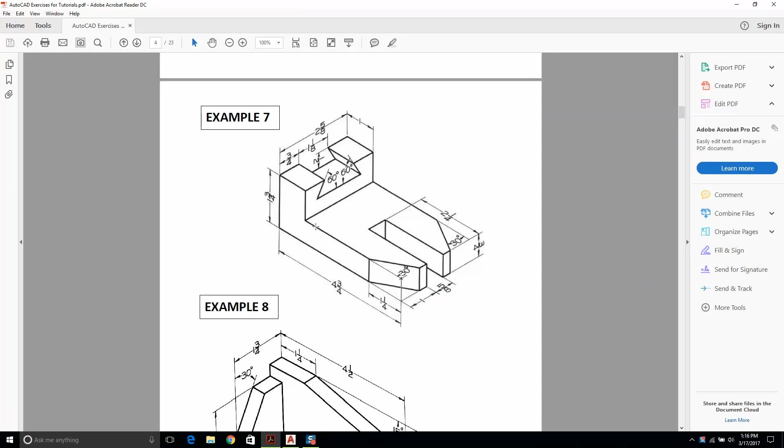We're on example number 7. I'll be honest, I'm going to skip example number 8. We'll do the 3 orthographic projections and an isometric in this video. I'm getting tired of the old orthographics, so I'll leave example number 8 for you to do yourself. The next video will be example number 9, where we'll teach you something called a polar array.

Okay, let's look at example number 7. What will we do? We're going to go new, sheet sets, manufacturing imperial, and this is our template that we're going to use. And I'm going to go to model.

I'm going to turn on the grid. I'm going to go to layer properties, and go new layer. We'll call this construction 1. Let's make this yellow, and let's just go with that. I'm going to give myself 0,0,0,0. My polar is on, so I can just snap to there like that. Lovely, we'll right click here, get rid of that, and let's have a look.

So let's just get our 3 boxes. This is going to be our front view, that's our top view, and that's our right hand view. Do you remember what type of orthographic projection it's called? It's called third angle here in the United States. That's the configuration of projection we're doing. So let's draw our 3 boxes.

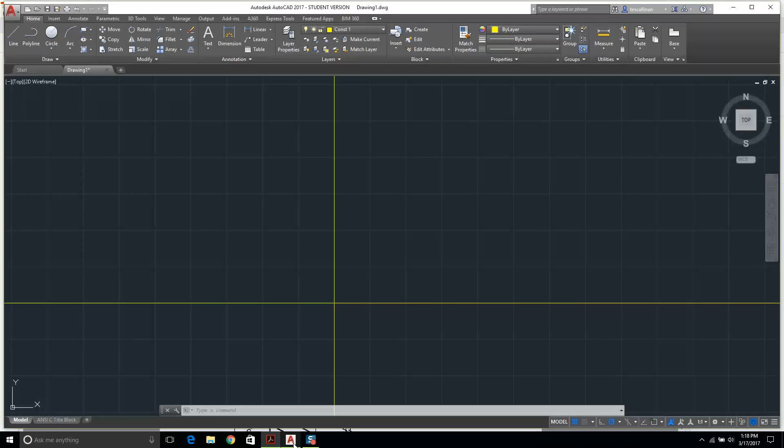We need 4 3/4, that's 4.75, to there. And what's the height? 1 3/4. So I'll go offset again, 1.75.

That's the first box. I'm going to do an array. I'm going to give myself a spacing of 2 inches. That's good. And I'm going to get myself another spacing of 2 inches.

I think the trick in this problem is going to be doing the isometric again. These angles are going to be a real pain, and I might not be able to do them. But hold on, let's not be too pessimistic. Right now, let's think about this.

I have 2 5/8, 2 5/8. Offset 2.625 to there, and then this has to be 2 5/8. I'm going to press enter, and then here. So here are our 3 boxes. This is our front view, this is our top, and that's our side.

Look, there's no harm in let's go new layer. We're going to call this Dimen 1. I'm going to make this side green because it's St. Patrick's Day today.

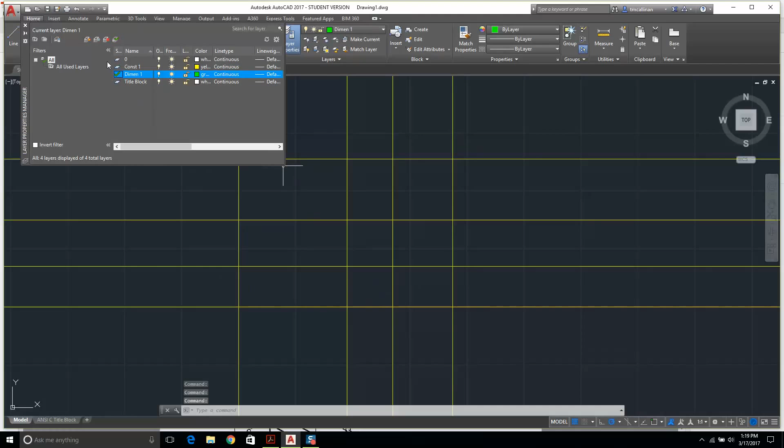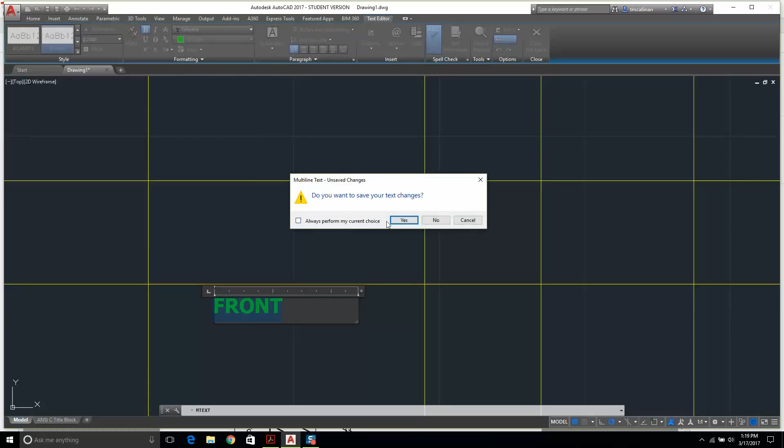And let's go text. I'm going to call this view front. I'm going to highlight it all. Romans, not really, I like Arial or Tahoma. There we go, and we go bold. That works, I like that. I'm going to put the front there.

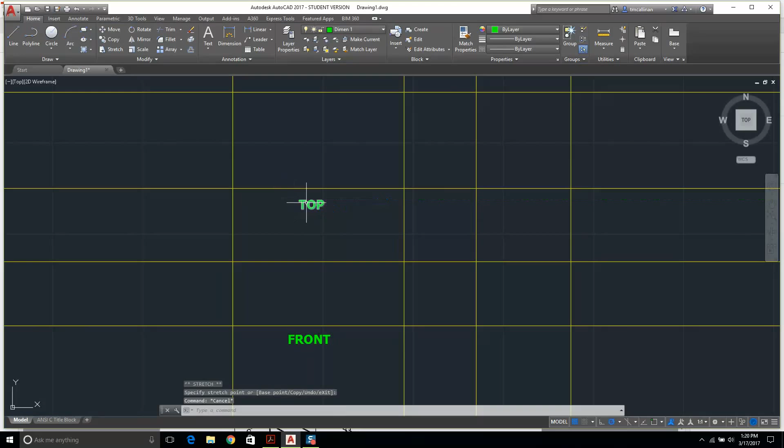Control C, Control V. That's going to be top. Now I need to move it over a little bit and line it up. That'll do. What am I doing here? I'm clicking on it, hitting Control C, then Control V. I'm copying and pasting, that's what it's called, you know that already. Alright, I'm pressing Control A to select everything, and I'm just putting it inside.

Okay, front, top, side. Alright, let's go back here for a sec. We have this L shape that we would see, and then we would come up 3/4. So it's like an L shape, and that's 1. Okay, I'm not going to remember any of that.

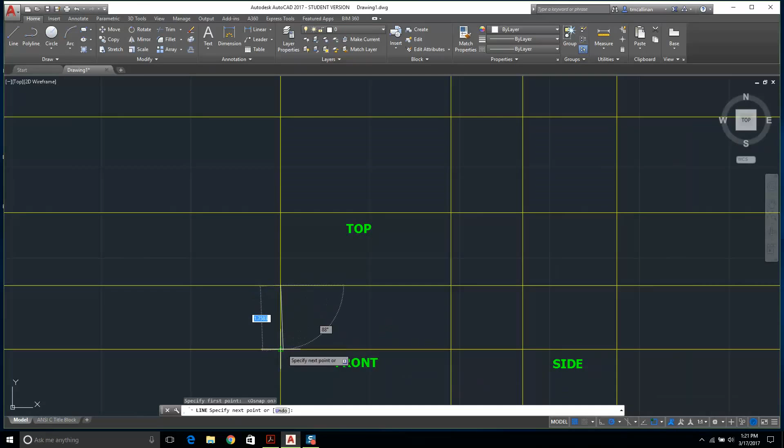Let's do this. I'm going to go back to my 0 layer, and it looks something like this. Now why is it not snapping? I'll turn on my snap. I'll go from there down to there, over to there. I need to come up 0.75.

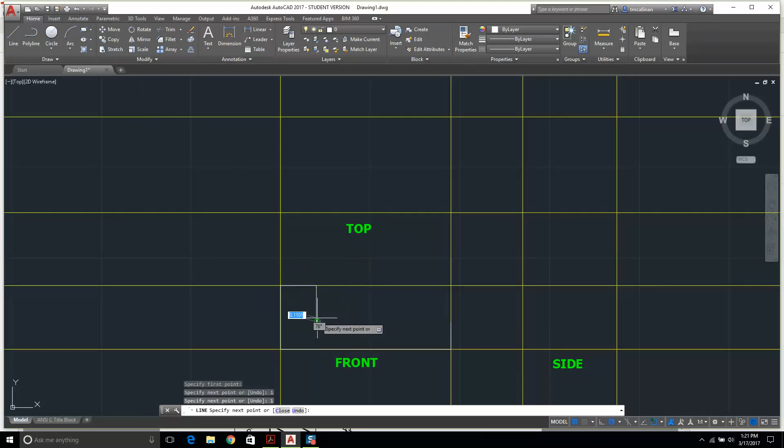Now what's that length? I may as well come over from the other side. That's 1 3/4, so it's 1 and 1. So I'll start here, I'll come over 1, come down 1, and then I come over and it snaps in. Lovely, I have my L shape.

Okay, that was easy. Now we have the L shape, let's worry about the top shape. So, alright, let's think about this.

What I would say is let's worry about, imagine that there's no cutout here, this 60-degree cutout, and imagine that there's no cutout here. Let's just deal with that. So I'm going to draw a rectangle from here to here.

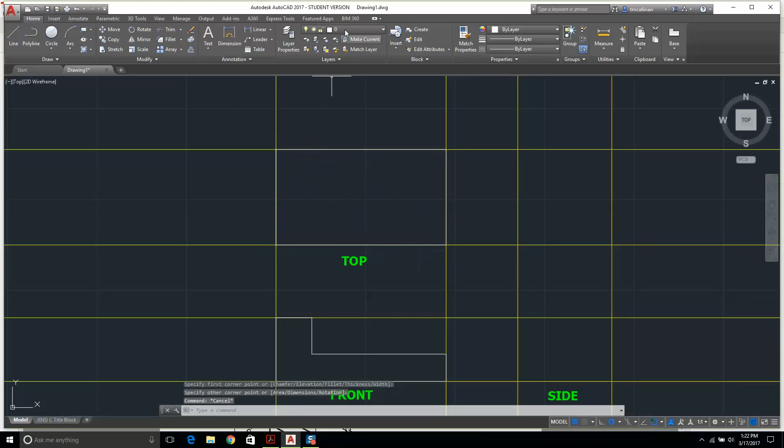I'm going to get myself a construction line, and I'm going to project this line all the way up, like so. And we know, or hopefully you know, that we'll have a line right there. Now we know that we have some sort of an angle going on here, so I need to come down 1 1/4. Let's just do a 1 1/4 line.

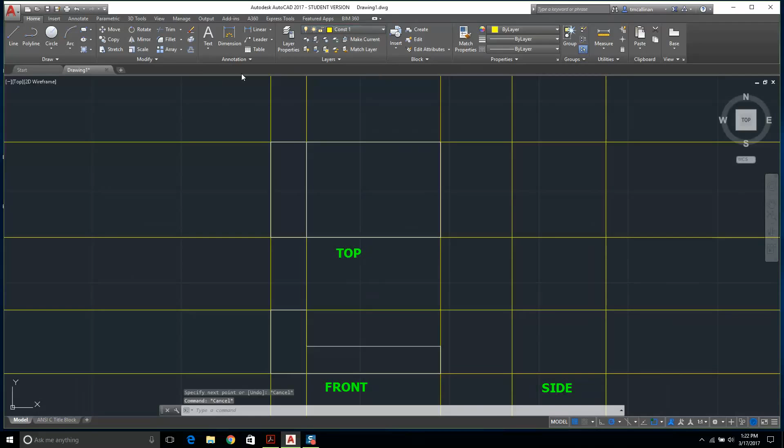All right, offset 1.25. And then how is it a 30-degree line from there? Okay.

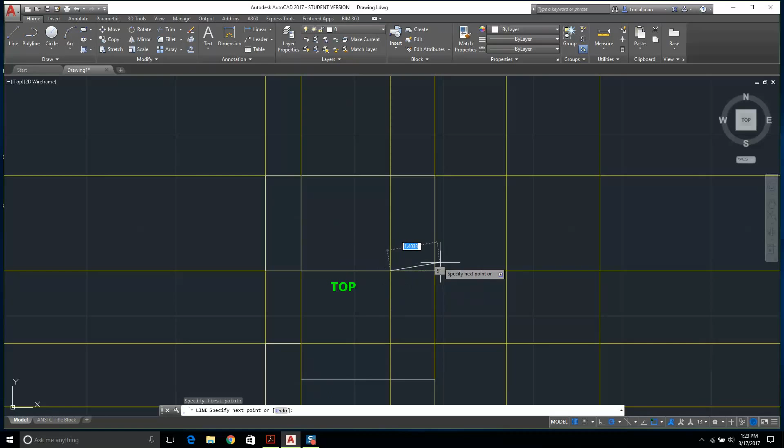What's my brain thinking here? I'm going to always pick the easiest way to do this. So I'm going to make that, make it a length of 3, then hit the Tab key, and make this 30 degrees. And that's what I got.

There's probably a better way to do this. I'm going to just trim it. So I have that, and let's get - I need a center line.

And we need a 2 1/4 from this end. An offset of 2.25.

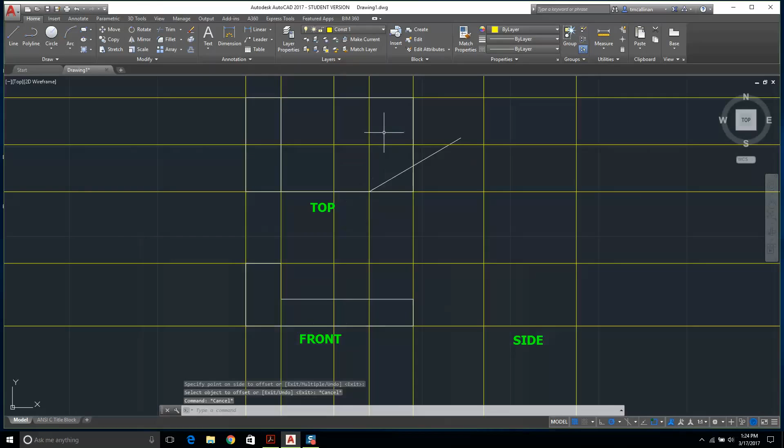Now what is there, there's a rectangle here that comes in. What is it? It's a width of 5/8. Oh, my brain is melted. What's 5/8? 0.625. That means it's 5/8.

I think that's 5/16 then, which is 0.3125. So I'll go offset 0.3125, and I'll go from there to there and there to there, and we have a box. Like so.

And I'm going to mirror that to the other side. So I'll go, where's mirror? Here it is. This is the chap that we want. I'm going to mirror, I can use that point and this point. I can use any 2 points along any of those lines. I've got loads of them to select from. And there. Do we want to delete the source object? I'm going to press enter because no.

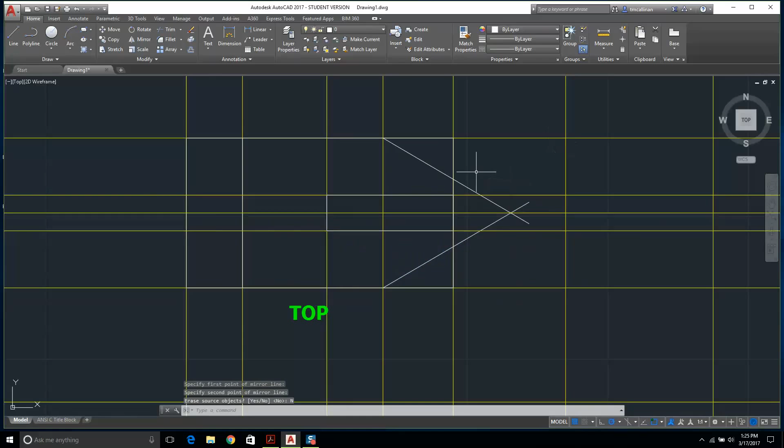And then I'm going to turn off my construction, see what's going on. And I'm going to hit trim. I press enter to select all, to select everything. What does that mean? I want to select all the geometry to be part of it, and then I can trim that. I can trim this. Lovely.

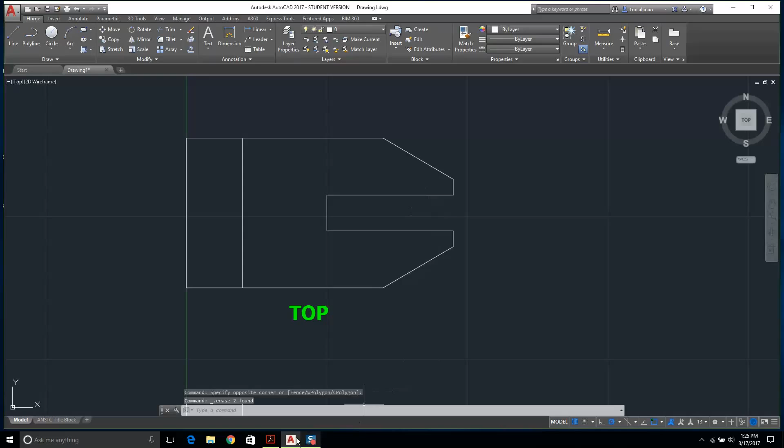Now, does that look right to you? Okay. All right.

And then we have this business going on here at the top. I'm going to draw that in the side view. So hold on a second. I'm going to turn on my construction lines. And I'm going to get myself a horizontal line.

Alright, rectangle, like so. Do you see, if you make this distance the same as this distance, and they're both 2 inches, you can do something, you can get yourself a 45. I don't know if I want to do that.

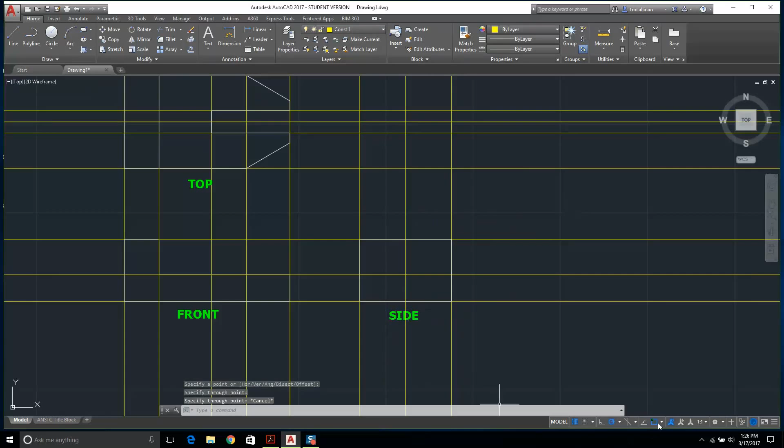Let me just get a center line here. Now I'm using that midpoint there, so make sure that midpoint is turned on in your object snap. We also have, hopefully you realize that there's a line there going from there to there. Why? It has a corresponding line here. Every line will have, not all, but it'll have a corresponding line. It might not be shown though.

Okay, now what do we need to do here? We need to go back to construction. I'm going to go to here, array, not array, offset, 0.3125. I'm going to make this guy offset to there, and make that offset to there. And I'm just going to draw these lines in.

Like so. Alright, okay. I'm going to delete all of these construction lines, anything I don't really need. I'm going to bring, I have this point here.

You see this point? I'm going to have to drop a line down there. You're going to see that edge. What am I talking about? It's this edge here. How do I get that? It's wherever that point is, I bring my construction line down. Let's just draw that line in.

Okay. Now I need to draw this. Okay, let's draw this. So I need to come down a half, and I have 1 1/8. So offset 0.5.

I need, let's get this 1 1/8. I'm going to get my old calculator out. Can I be of assistance? 1.125 divided by 2, thinking... 0.5625. Thank you.

Alright, offset 0.5625, and I'm going to go from here to there and from there to there. Now, 60 degrees from there down, and 60 degrees.

Let's go back and think about this. Okay, 60 degrees. So from there I need a 60-degree line, and from there I need a 60-degree line. And I'm just going to get my 0, my main layer. I'm going to come here.

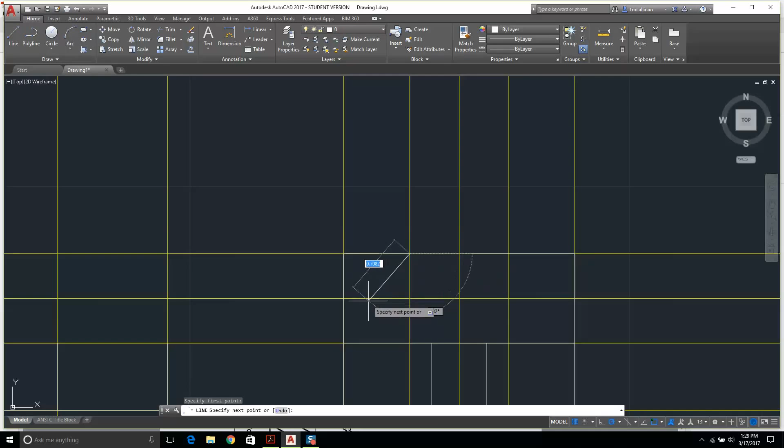Now it's telling, if I don't really care about the length, I'm going to make this just 1, and I'm going to hit tab. And I want that to be 120.

Okay, and I'm going to check it. Dimension. I'm going to go from, that's nice, yeah. Now it won't lock onto that because it's a construction line, so I'm going to have to draw another temporary line. Now let me think about this. Is that really going to be 60 degrees?

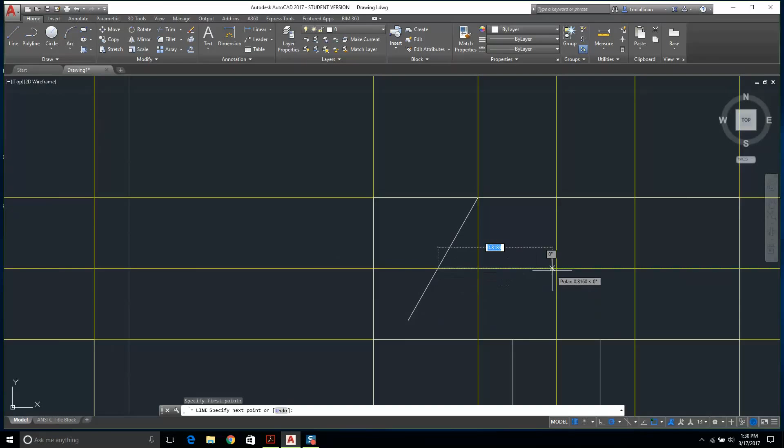It's going to be this, lad. Okay, let's do this. Let's get rid of that. Let's draw that in there like so. And I'll get my dimension, and I'll go from here to there.

Lovely. Okay, I have to think it. I've been doing stuff like this for a long time, and this stuff makes me think, and that's not necessarily a bad thing. Okay.

Let's mirror all of this to the other side. Select objects. I'm going to go from there to there, and then I'm going to turn off my... what's going on there? I did that too fast. Mirror, there to there. Erase source objects, no.

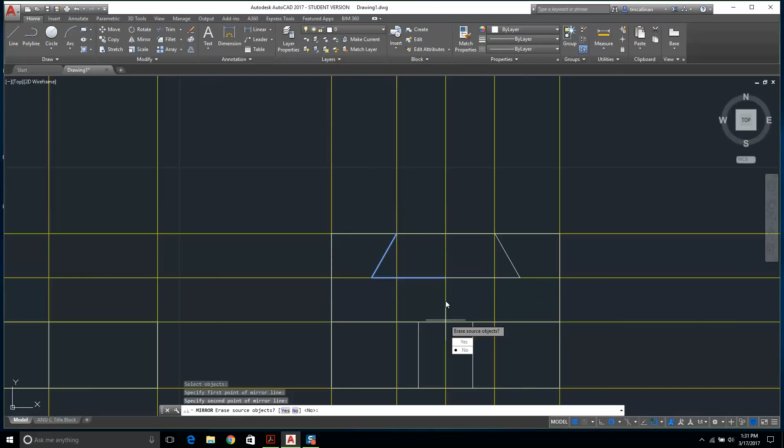Okay. Trim. Boom. That wasn't too painful.

Top, front, side. Now we have to... I don't see any line here. Now I'm going to get rid of both of those lines and have one line.

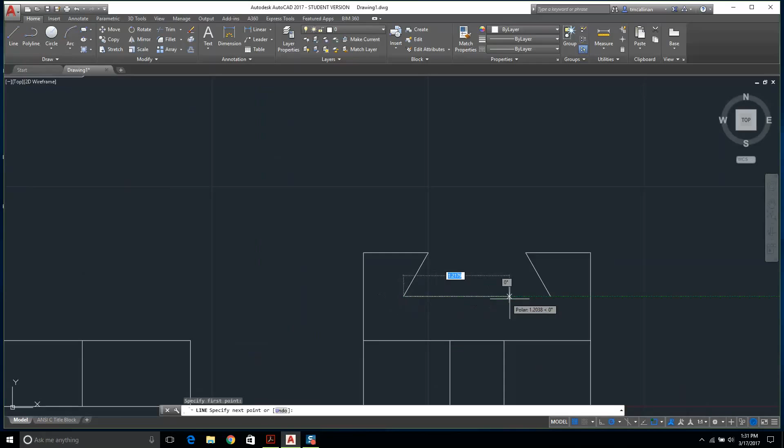I don't see any corresponding line over here. This line should have a cousin over here, which I do not see. And would we see that line? This is a cutout here, and we see this outside wall. Would we see that line there? No, we won't, but it's still there.

So what type of line do we use? Do you remember? Right click, new layer, hidden, continuous, load, hidden. No, come on. Lovely.

Alright, I'm going to get myself my hidden line, I'm going to put a line from there to there, and that'll do the job.

What else? We have a cutout here. Where is this line? This line should have a corresponding line down there. We need to show from this view that this cutout goes all the way through, but can we see it from this side? We can't. It's still there though. Every line should have a cousin. So this line is going to have a line here. It's hidden because it's behind the object.

Now let's think. We're going to see... I'm going to do something like this. I was disputing whether I was going to do it or not. I'm going to get myself a 45-degree line.

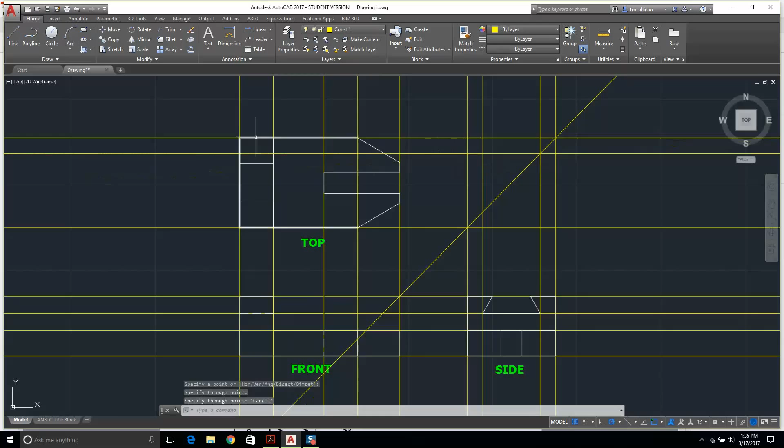Wherever this intersects, wherever that intersects, we're going to transcribe, if that's even a word, a line across, or just scribe a line over, like so. What type of line are we going to draw here? A hidden line.

Right, let's turn off the construction layer. And is there anything missing here? We're missing two lines. Are we missing more? Just two lines, I think.

If we're looking in from the front of this object, you'll see 6 lines. You'll see this line, you'll see this, you'll see this, you'll see this, you'll see this, and you'll see the other one. Now, so we're missing those two lines.

So let's turn on the construction, and let's just get rid of these lines here.

Some people, when they're drawing this type of drawing, will have multiple construction layers. They will not delete the existing construction layer, which is smart. They'll just hide it and then create another one. I'm too lazy to do that, but look, that's the right way of doing it. I'm teaching you bad habits already.

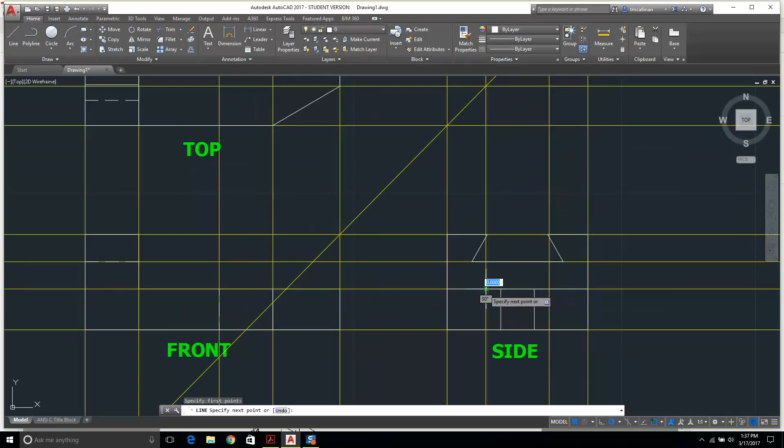So I bring those down, and then here we go. We have from there to there, and from there to there, and let's turn off the construction layer. Okay, top, front, side. I think that's it.

Right, I'm going to take a quick cup of tea. We're going to do the isometric, which is going to be a beast, I think. And then we're going to add the dimensions, and then we're going to put it on a drawing. I'll see you in a few minutes.

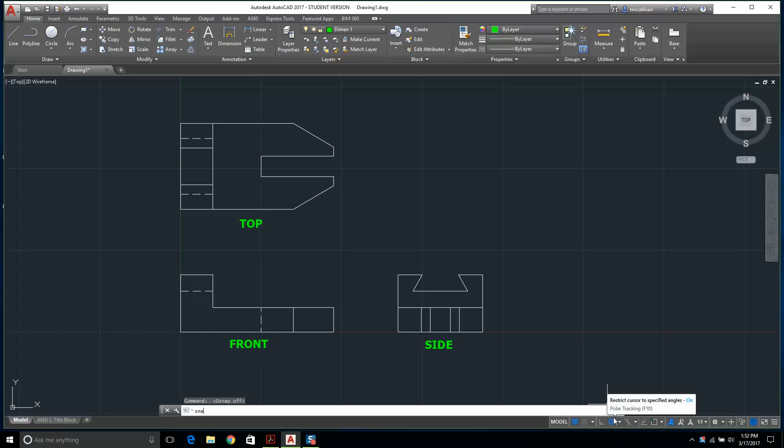Right, so the next step, we're going to do the isometric, then we'll do the dimensions, and then we'll throw it on the drawing. In order to do the isometric, I'm going to turn off the snap, F9. I'm going to use a normal snap, but let me look at these dimensions here for a second.

5/8, 1/8, so we're going to have to use a 1/8 snap. That's fine. And right, snap. What size? 0.125. Okay. And then I'm going to turn on the ISO plane, and we're drawn in a different plane or angle.

So let's look at this here. This is where we're going to start. We'll go down 4 3/4. We'll box all this in. Let's just start with the L shape, 4 3/4.

So I'm going to start right here, and I'm going to come down 4.75. I'm on the wrong layer. Let's put this on 0. There you go.

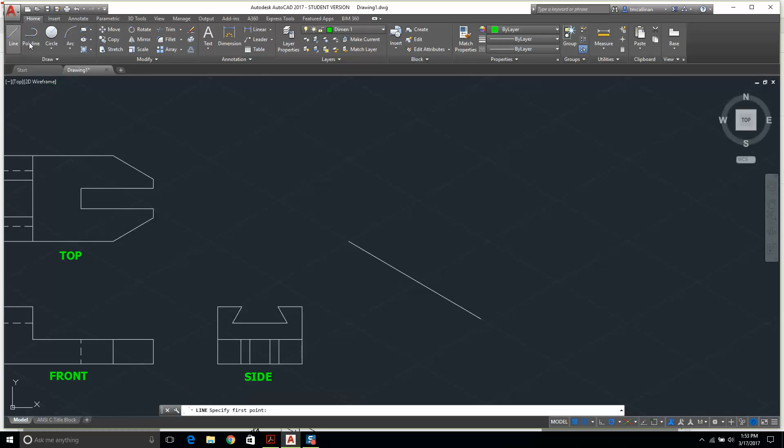4.75. And how high are we going to go? 1 3/4. 1.75. Ah, shite. Stay there. There you go.

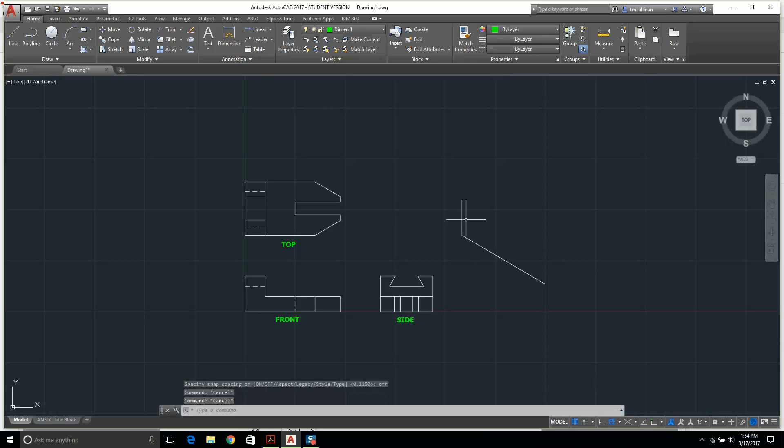And we have the dimensions here. I didn't put the dimensions on. Go on, let's put these dimensions on here, and it'll make life a bit easier. I'm going to turn the snap off. Come on now. Snap off. And let's go back to let's turn this off. Come on now. There we go. And we get the dimensions going.

1.75. 0.75. From there to there. 2 5/8. We go from here to there. Let's bring this out a little bit. No, that's good. That's good.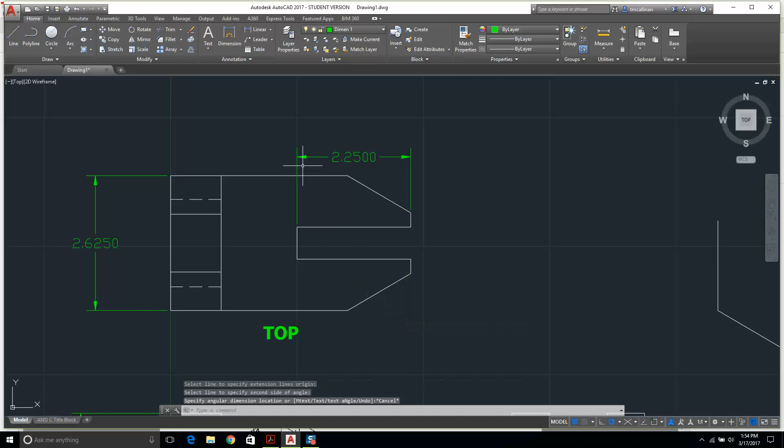And then we go from here, that point there, to there. No, I don't. Okay, let's do this. We go from here to there. 30 degrees is better. From there to there, 1. What else?

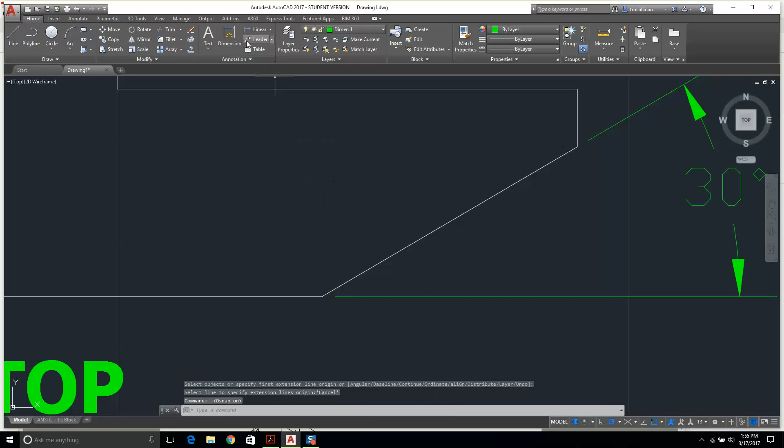Right, I need my snap back on object snap if I want to get these points. Come on, there you go. To there, lovely. Let's zoom out. Okay, 1.25. What else are we missing here? We have that depth. We need this width.

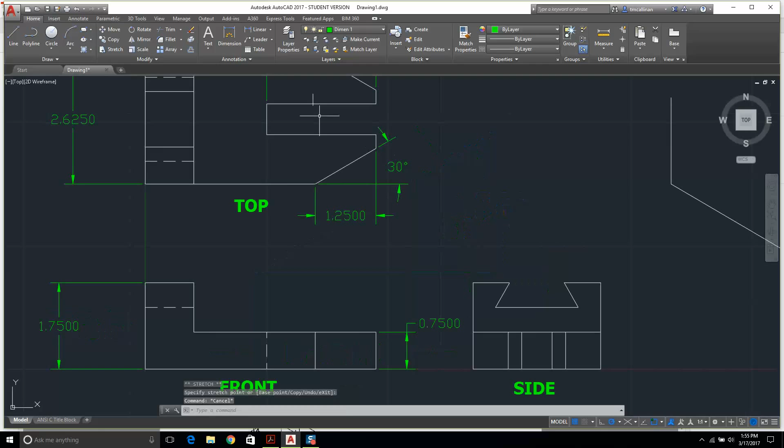Let's move him in a bit closer. You go from there to there. That's a bit funky. Let's try that again. 0.75, lovely. I wish those dimensions didn't cross there.

I'll see if I can mess with that in a sec. What else we missed? We got that. We got the angles. I think we want to put in a center line. Annotate a center line. Put one in from there to there. We got that. This looks good.

We need an overall dimension there. That'll do. I don't like having these guys. Can I move that up there like that?

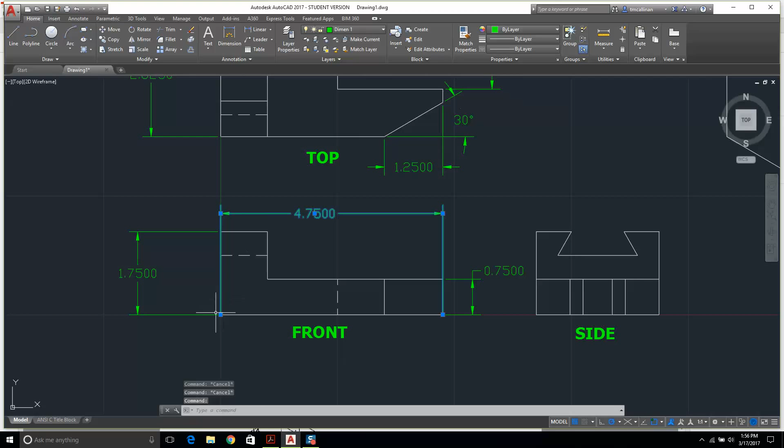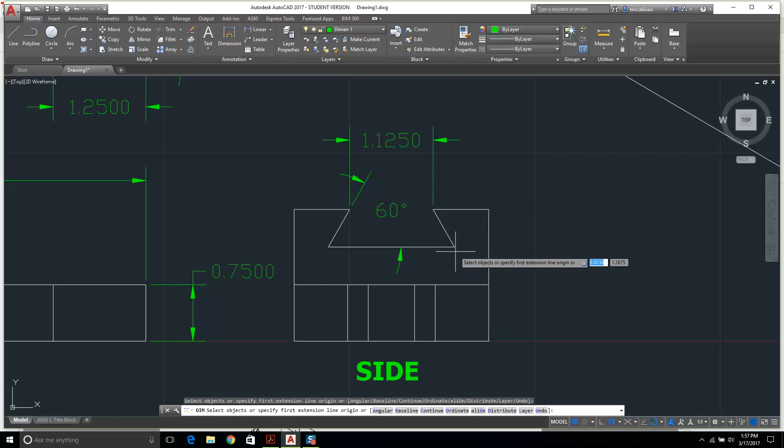4.75. Now we get these angles going. Let's get another center line in. I don't like that, no. 0.5. Right, what else can we have here? What are we missing? I think that's it.

Okay, now let's get back to our isometric. That wasn't too painful. And let's turn this back on. Let's turn off the object snap. Let's turn on the normal snap. And let's set it to 0.125. Okay. Now how we're here.

I need to come up points. The advantage of putting your dimensions in here before doing this is if I'm looking at trying to figure out a dimension and I'm not showing it here, then I know that I'm missing it. So I'm at this point, and I'm coming up. I had to snap. I didn't use an object snap to find that point. It's just a normal snap.

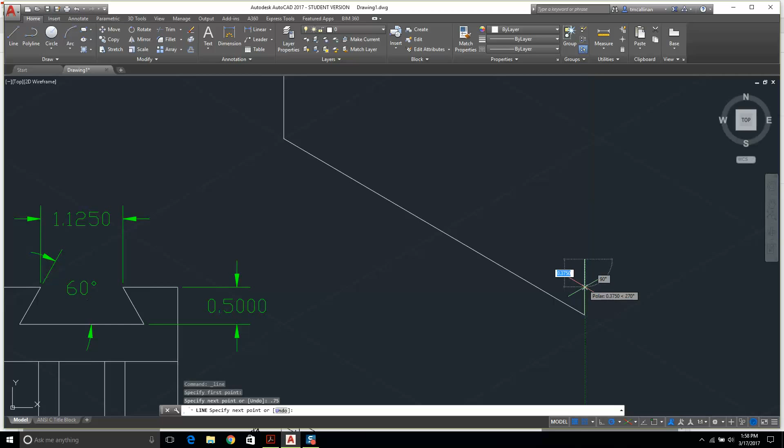I'm going to bring it north, 0.75, and then I'm going to come over. I'm going to see. I'm kind of guessing though. You know, am I on the right? Am I the right angle there? Now what is that? That's 2.625.

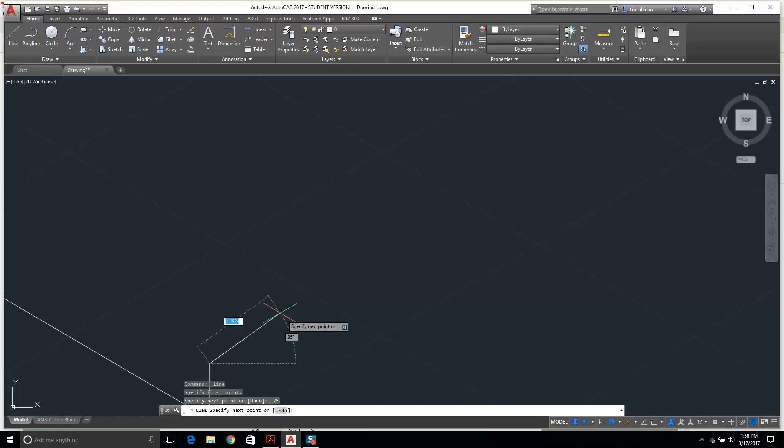2.625. And I'll come down 0.75 and over there like that. So just let's box this in. If I put a dimension on this 4.75, that's to the very end. That's okay. And then we're here, and I'm going to bring this down. How much?

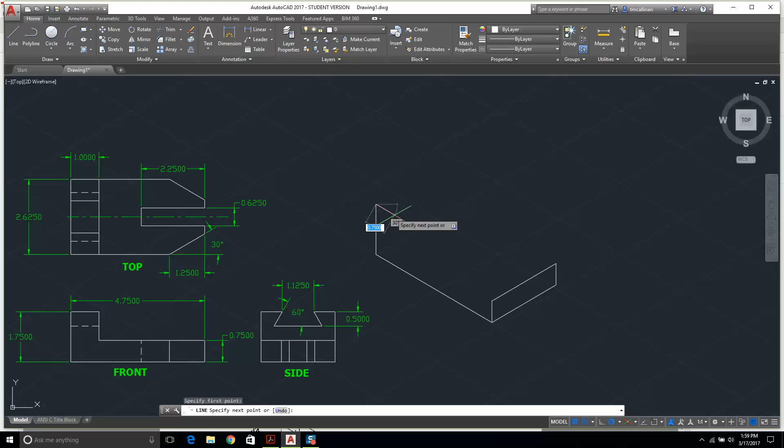1. Then I'm going to come down. I'm checking that all of these lines are parallel when I'm drawing. These lines are parallel. These lines are parallel. If they're not parallel, you're going off the wrong angle.

Now we said 1.75, so this comes down. Stop. This comes down 1, and then that should lock into there. Now does that look right? I think so. Okay.

I'm going to go here, and we're going to come over 2.625. Is that right? 2.625. And I'll stop. Come here. I'll come down 1, and then see, something's not right there. 2.625. 2.625 over in this direction.

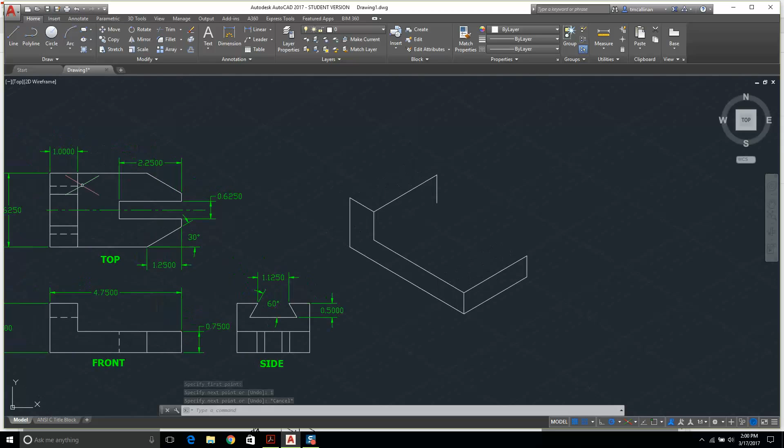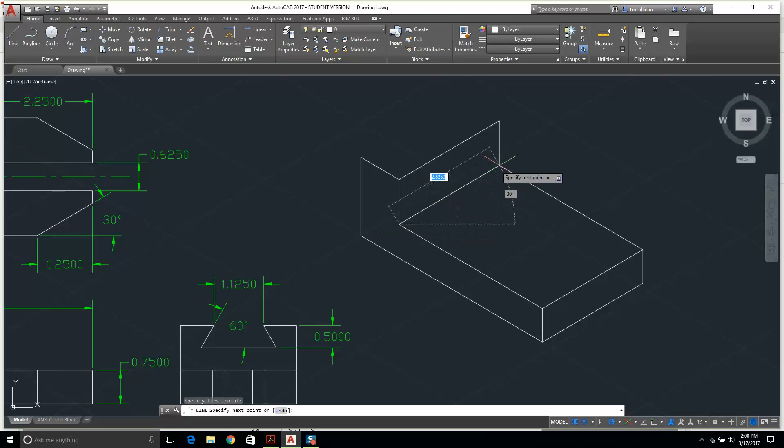Let's get a dimension on this. 2.625. 2.625. Okay. Now what's wrong? Let's maybe can I connect this to there? I think that's right then, and then I'll go from here to there, and we'll get this, and we have that. Painful. Okay, we got that.

The next step is getting this cut out here. I feel like I need a break after doing that. It's that taxing on me. Anyway,

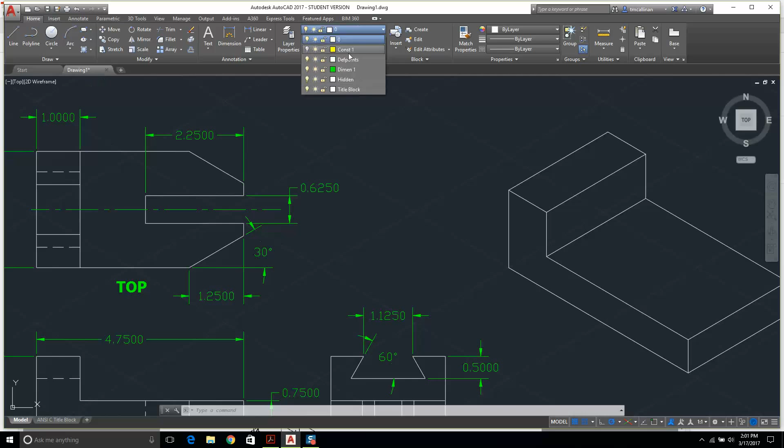I'd love to have a dimension. I'm going to just put this in here. That goes from that line there to, and I'm going to turn off this. Come on now, go ahead, yeah.

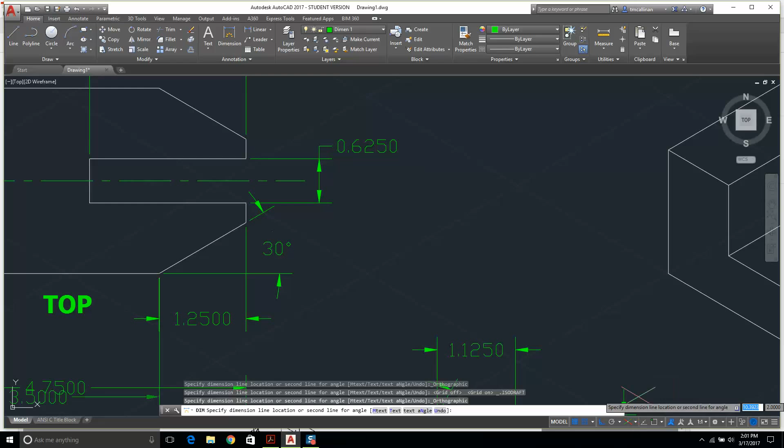How do I get out of ISO mode? Alright, how do I get back into snap mode. I think that's my snap, grid snap, and I can change it. Okay, I got that. Now I have isometric snap on. I'm going to go to rectangular snap.

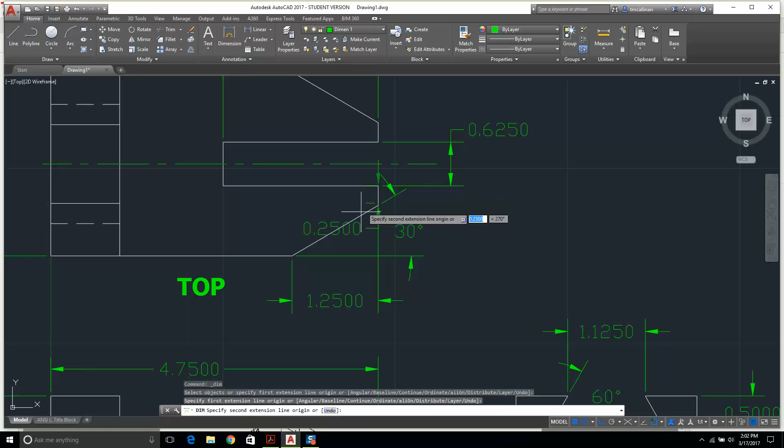So let's get a dimension going from there. From that point, I'm going to start swearing now in about 2 seconds. But anyway, 1 inch, okay, pain.

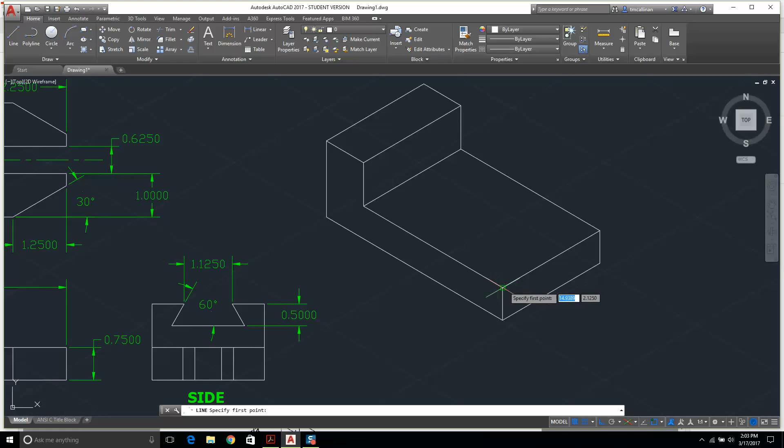Alright, let's turn on ISO. I need to right-click snap mode here, snap settings. We want isometric snap. 0. One. Now what is it? 2.25. It's a very loud ringtone. 0.625. Bloody hell.

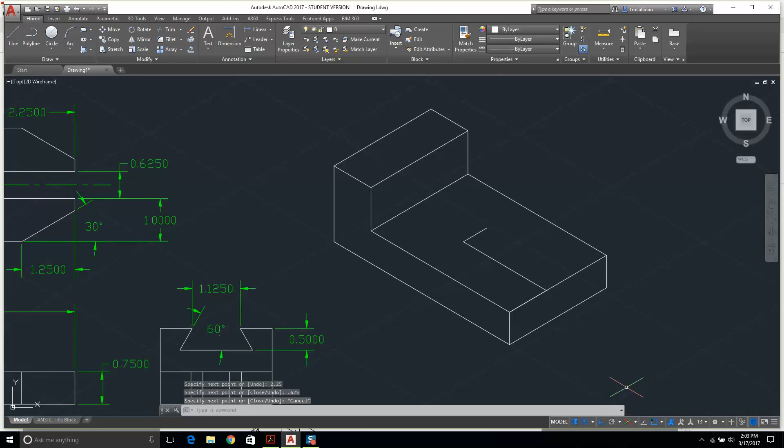Let's turn off this snap here, F3. Okay, this brings me back. What we're going to do now is I need to go from here. Okay, now why is that not snapping? Do I need to change this ISO plane?

Here we go, 0.75. And I'm just going to bring this line all the way down. That's all you're going to see of that. And then I hit trim, press enter, and get rid of that, get myself a line here. And that looks decent enough.

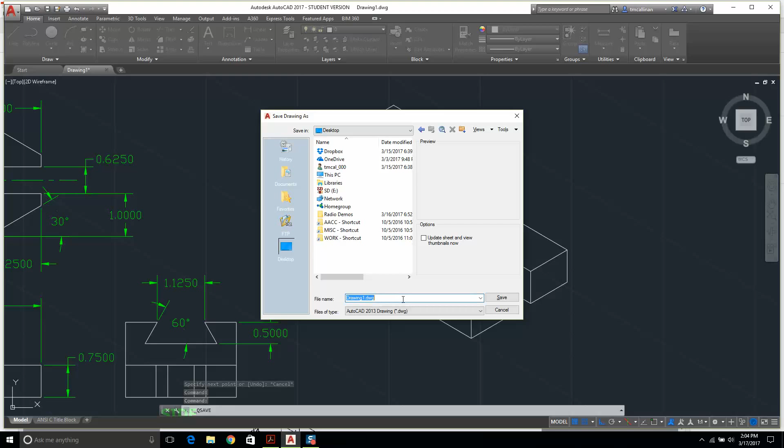Let's save this, and let's call this, what are we on now? Lesson 7. The isometrics, I told you before, but they're challenging.

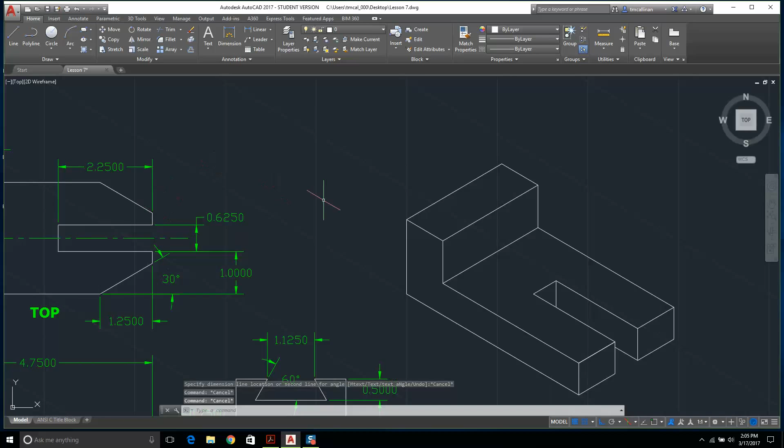Okay, so I'm going to come up 1 1/4. I'm going to come up here. Now what? I'd like a dimension that goes from... can I go from there to there? I have a 30. Okay, let's find where this line is first of all. That's confusing enough. It's 1 1/4.

I'm going to draw a line from there up 1.25, and then I'm going to draw a line up like so, and do the same on this side. I'm going to come over 1.25, and draw a line up like so. I know I have a 30-degree line going off. I can't just put 30 degrees in, I don't even know how I'd do that. I need to know where that point is.

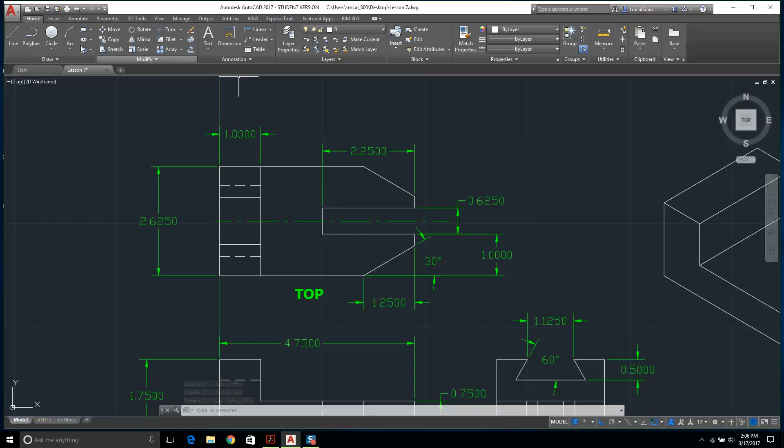Okay, let's turn off the old snap mode. Let's turn on, I'm going to go to snap settings and go rectangular snap. And I need to know this dimension, from this line to there. Let's try that again. I'm going to go from there to there. That's some mad... 0.7217.

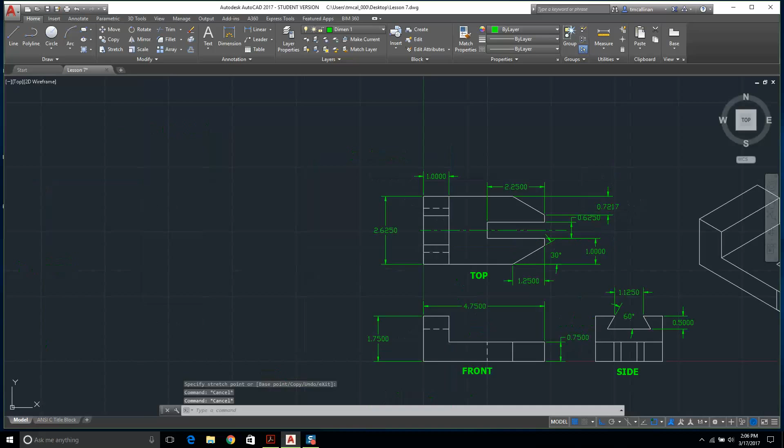0.72, I'm going to delete that in a second. 0.7217, that's a bit strange. Okay, I'm going to go to 0, and start here, and come over there. 0.7217.

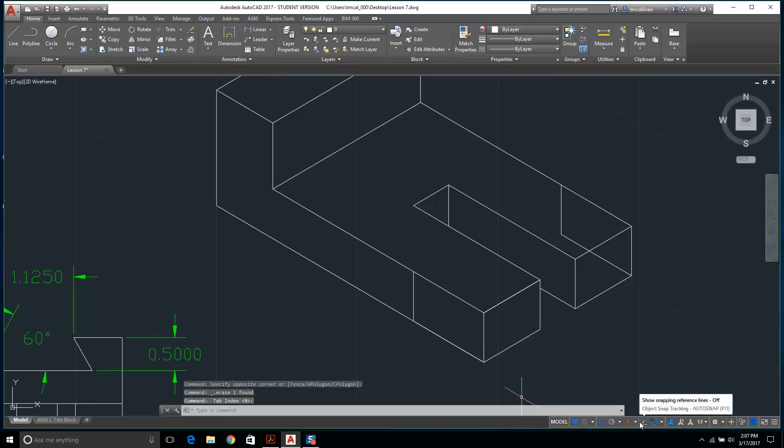No, we've got to turn on snap settings, turn on isometric snap. I need to turn on isoplane top. I'll get myself a line. I'm going to start there, and hit F3 to turn this stuff off. I'm turning off the object snap, 0.7217.

And I'm going to drop — now see, I'm in the wrong one, at least I have that line there now. I'm going to go to isoplane left, and... no. Isoplane right, that's probably what we want. Okay, line. See, I can't snap to that anymore, so let's do this again.

Oh my god, line. I don't have a snap anymore, that's why. Snap. 0.125, okay, there we go.

Let's start from there, and we're going to come up 0.7217. Will it let me do that? And then I come down to here. And I'm going to do the same from here, down 0.7217, and drop that down.

And I'm going to get my trim. 1. Why won't it let me get rid of that? I'm going to turn off trim, press enter. Interesting, yeah. Look, I don't know why it won't let me delete these things.

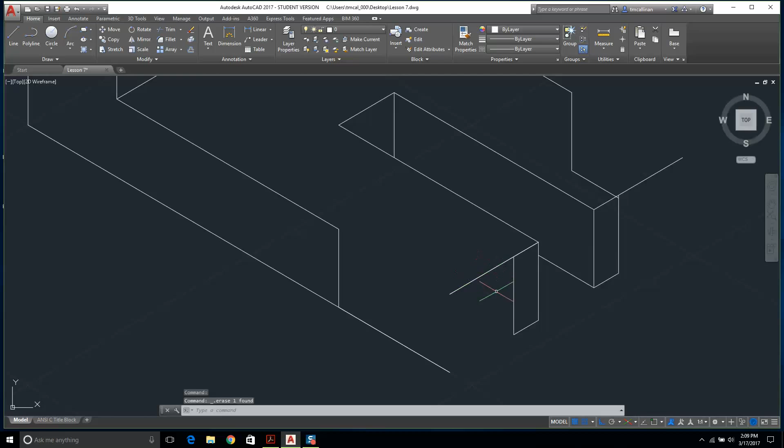What happens if I can go in there? I'm manually deleting these things. I apologize, I'm doing a poor job of explaining what's going on. It's honestly tricky stuff.

Let's just do this side here for a second. My lazy brain wants me to just grab this point and move this over. In order to do that, I'm going to have to turn on the snap, F3. I think, there you go.

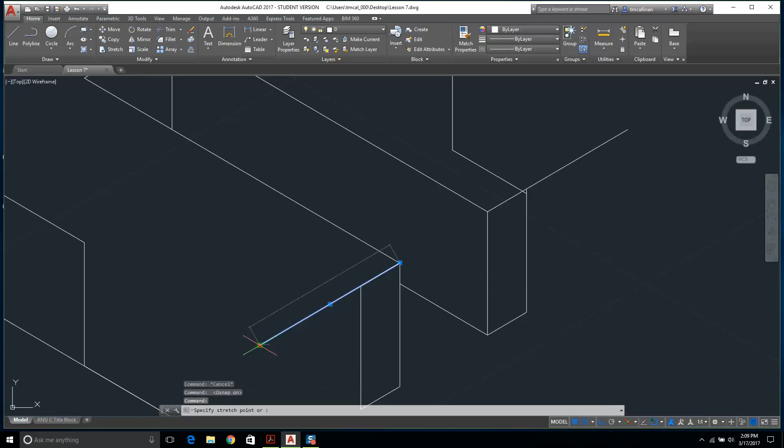Why is there 2 lines there? There you go, and then I'm going to get rid of this, and I'm going to just have to trim that. There we go. And then we're going to connect this point to there, and this point to there.

Tough stuff. I'm going to delete this bit of it, and I'm going to delete that bit of it, and it's going to go from that point. This thing is going crazy. Right, let's go. Can we go trim? Enter, and get rid of that.

Let's turn off our snap, let's see if we can do it. I'm going to go from there to there. That's it. We'll hit save.

Stuff is tough. When you've been using SolidWorks, it makes this stuff so easy. But this, it's good to know where we get it from.

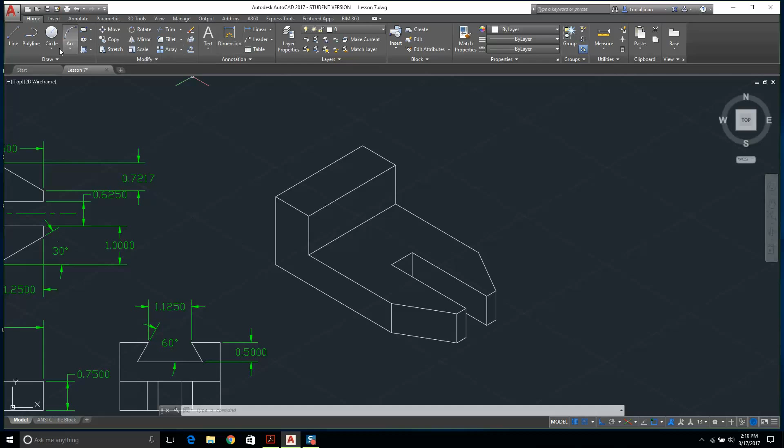All right, I'm going to come up 3/4 and then over, so we'll get these lines here. So let's start with that. Line, 0.375. Is it 3/4 or 3/8? I can't remember, 3/4, okay. Line, 0.75.

Last stop. Let's turn off, hit F3 to turn off the snap. And then I'm going to come down here, 0.75, and then over, and then I'm going to hit trim, hit enter to select all, and get rid of that stuff.

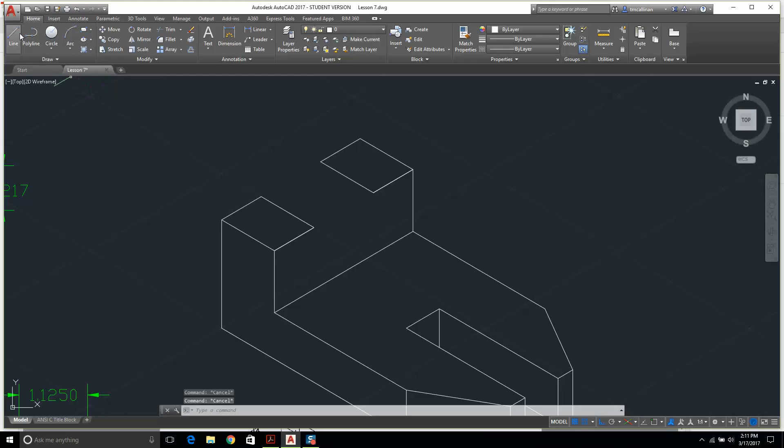Alright, okay, what's next? We need to come down a 1/2 inch here and then draw a line, scribe a line across. So I'm going to probably have to get a different isoplane, one that points down. I don't like that one there, I'm going to try the other isoplane. No, that's the one we want, because I'm going to come down 0.5, but then I'm going to come all the way across.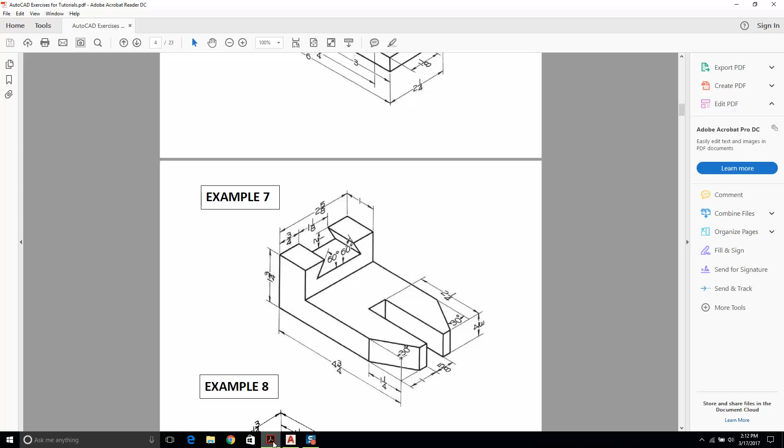Now I need to know what this dimension is here, or I need to know what that dimension is.

You doing alright, babe? Alright. Did he do his business?

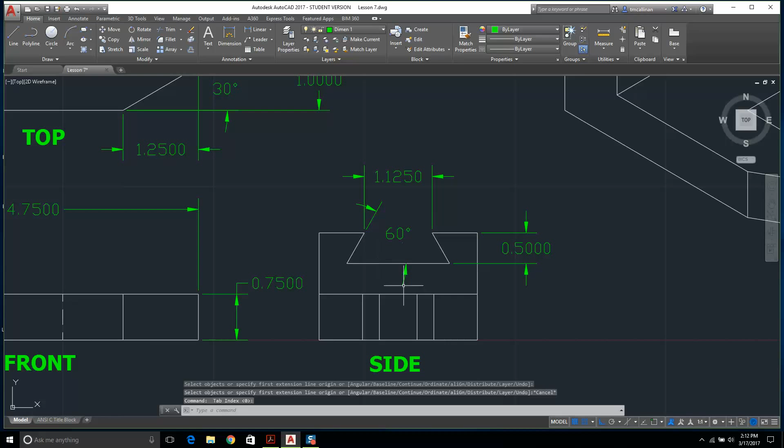F3. And I'm going to go from there to there. Strange, it's a funny dimension. What about if we go from here to there? Let's just get this dimension here.

So you have the snaps turned on, it's going to drive you nuts, we'll have to turn it off. Just so we're clear, this is object snap, but then there's the snapping to the grid, and both of them have use.

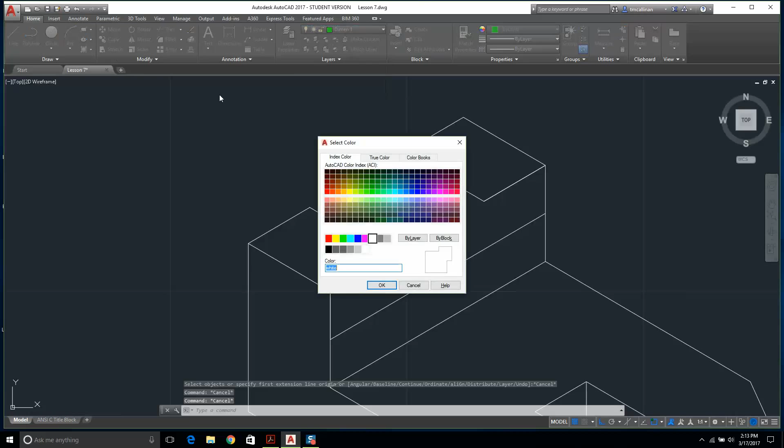Okay, 0.4613. 0.4613, okay. So in order to get this point here, I need to get on this line.

We need to turn on the snap settings, turn on isometric snap, and I'll start here and come over 0.4613, and I should have, and if I come over, let's change the isoplane, we want to go in this direction, so I'm going to come over 1 inch, isn't it?

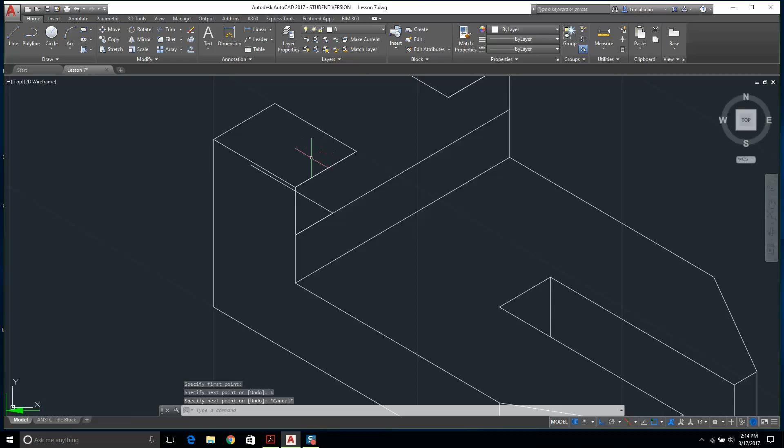So the line I want, what's up Ollie, is going to go from there to there, and I don't need this because you're not going to see that. I'm going to hit trim.

What was that? Let's delete that. Okay.

0.4613. Let's go back here and do the same on the other side. I'll get a line. Can I go down in this direction? No.

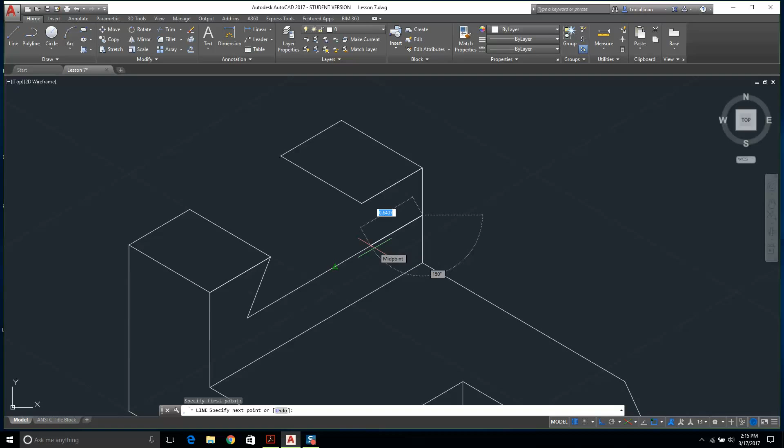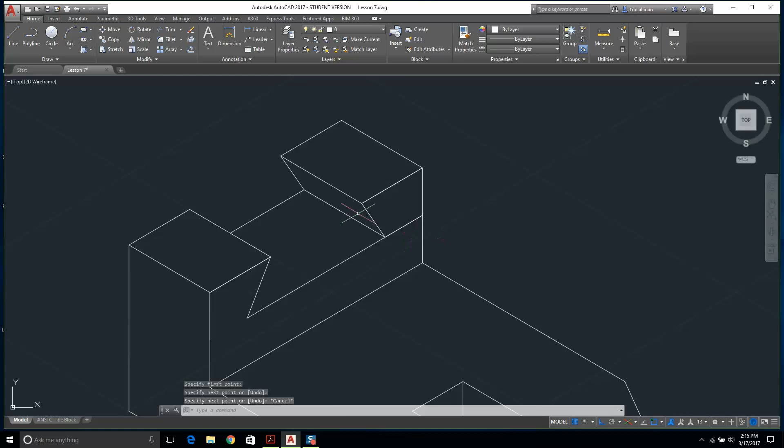.4613, and then I come up in this direction 1, and I'll draw a line from there to there, and there to there, and this point to there. Is that correct? And then we get our trim, and I think I deserve a beer.

There, that's it. Is that right or is that wonky? It's hard to know.

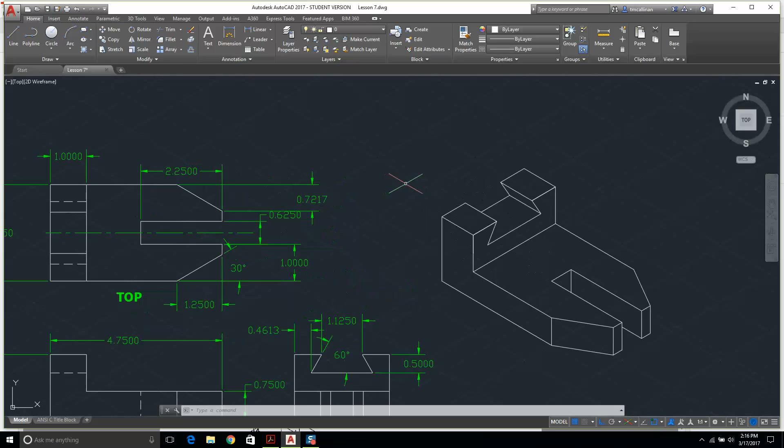So, what's next? Can we do it with that dimension there? Come on. Let's turn off the snap. Hit F3, here we go. Now we can move that stuff around a bit better. Let's just line up these dimensions.

Okay, I'm going to move this over a bit closer. There we go.

I think that's it. I'm going to go to ANSI title block. I go to layout, rectangular. I press enter. Let's do this. Let's delete the viewport.

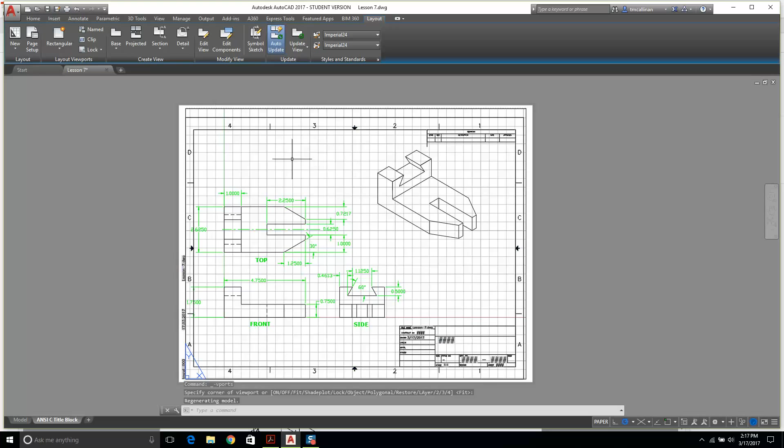Let's go back here, turn off the grid, go back to the title block, layout, rectangular, double click in here, and I'm going to drop this down here, this zoom, and get zoom window, and make this just a little bit bigger. That is looking good.

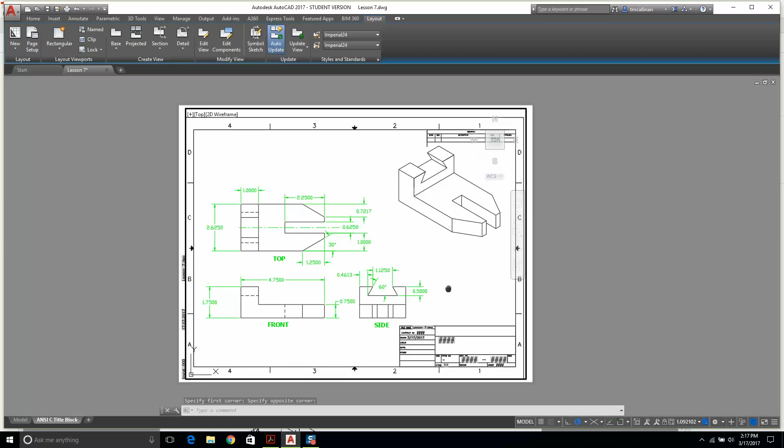Hit model to get back into paper space. You can double click, I'm too lazy now. It's St. Patrick's Day, I'm going to pack it in, but you're going to double click on this stuff and change the name. You're going to add your name, add the organization. What else? That's about it.

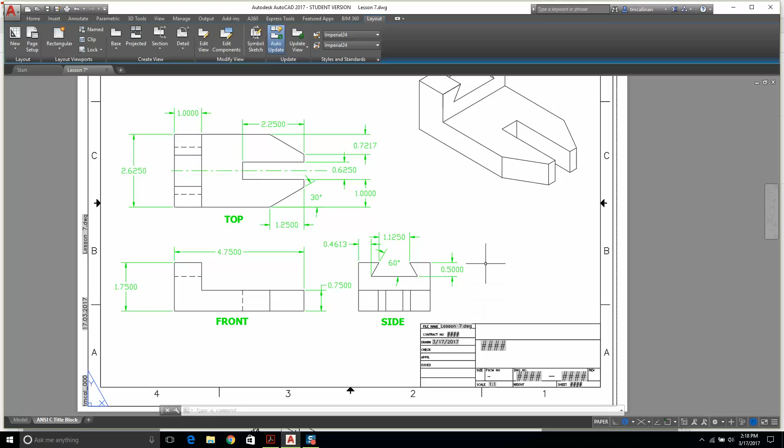What is this? It's going to be AutoCAD lesson number 7, and that was it. That isometric really beat me up. I haven't done one in a while. I'm not really sure if this is right, but it looks okay, and you have all the dimensions in there. It's not a bad job.

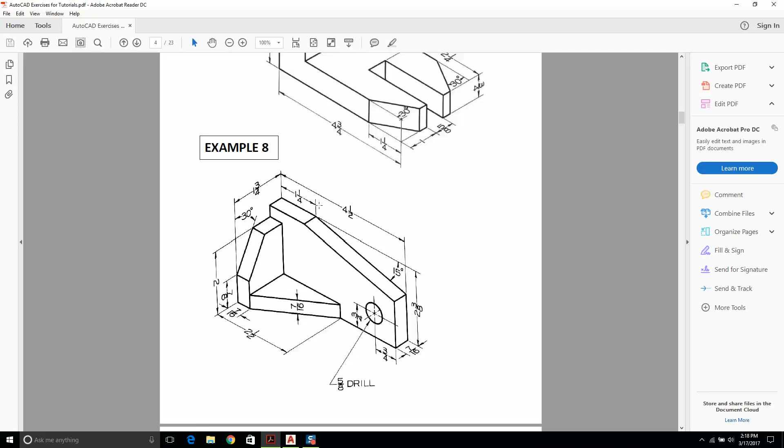And the next exercise I'm going to turn on to is this. Shouldn't be too difficult, you should definitely be able to do this. I'm not going to bother doing that because I'm sick and tired of isometrics. I'm going to move on to example number 9, and we're going to cover something called a polar array and practice with the dimensions. That's it, take care, and I'll see you in the next video.